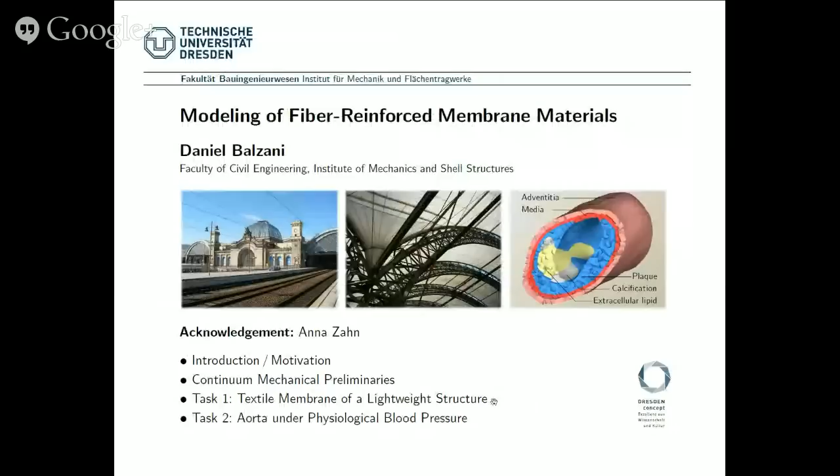So first I will give a short introduction or motivation. Then I will explain some continuum mechanical preliminaries that will be required for solving this task. And then I will come to the two main parts of this task. Task 1 will be the calculation of a textile membrane of a lightweight structure, and the second task will be the calculation of an aorta under physiological blood pressure.

Okay, with respect to the first task, we will focus on textile membranes. These are typically used in engineering applications as, for example, lightweight roof constructions, as exemplarily shown here, or also the roof construction of Dresden Main Station, and also facade cover design, weatherproof awnings, and so on.

The main composition of the material is, as exemplarily shown here, that we have a rather isotropic, soft matrix material, and embedded therein we have a woven fiber network of rather stiff fibers. Those are the ones that are shown here. And they are rather wavy-like.

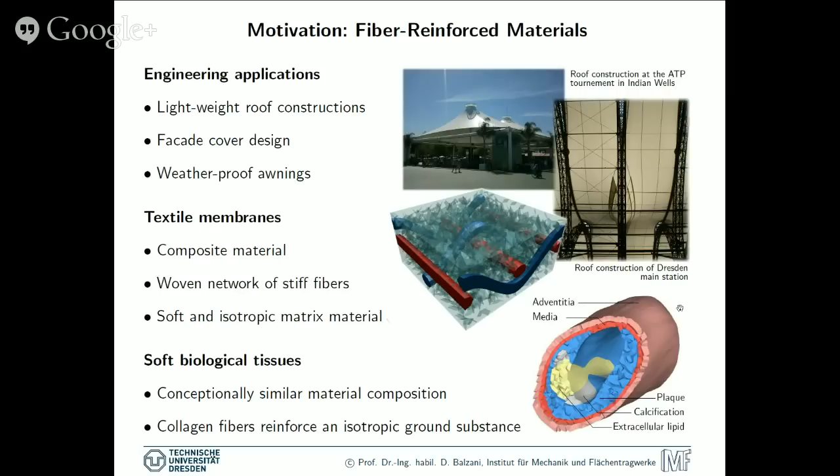In soft biological tissues, we have a conceptually similar material composition where we also have an isotropic ground substance and embedded fibers. Here, with respect to the passive response, typically the collagen fibers that are arranged crosswise helically around this arterial wall. So those two materials are going to be basically calculated in my task.

So first, some continuum mechanical preliminaries that you may need. First, some assumptions. So we consider only idealizations as thin membranes, although we know that in particular diseased arteries may not be really thin. However, this is a necessary idealization to calculate this analytically. Then we focus on the small strain framework, although the materials undergo large strains, but that's just for simplification.

And then we focus on a transversely isotropic model, which means that we have a stiff fiber direction A, and perpendicular to this we have isotropy. And we use this transversely isotropic model for the representation of the individual fiber reinforcement.

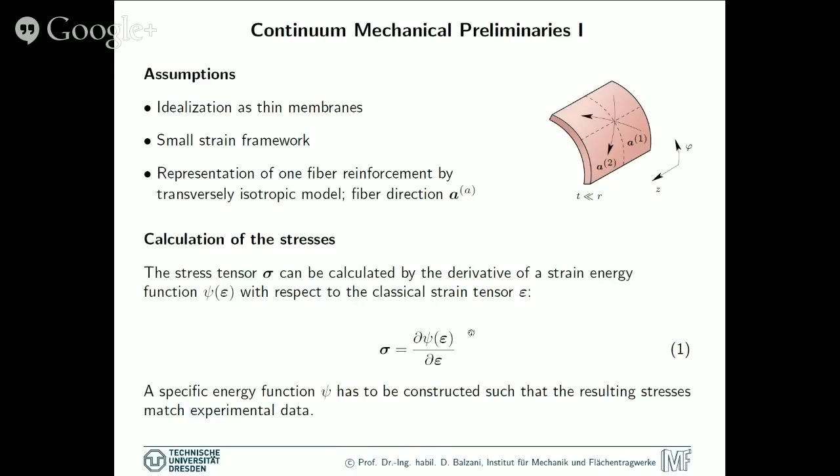For these materials, we can calculate the stresses basically on the equation that is given here. So sigma would be the stresses in the small strain framework, and these can be calculated by a derivative of this strain energy function psi, which is a function of the strain tensor for small strains epsilon, with respect to these strains epsilon. Of course, this specific strain energy function has to be constructed for the particular material such that characteristic stress-strain curves that are measured experimentally can be matched.

Here the particular strain energy function is given, so that's the specific form of the energy function that we consider here. It is decomposed into an isotropic part describing the matrix material and the superposition of two transversely isotropic parts that account for the individual fiber reinforcement. So that would be the transversely isotropic energy associated with one fiber, A. So A is the summation index from 1 till 2.

Material parameters in here are first the Lamé constants and this additional elasticity parameter alpha, which captures the elasticity in fiber direction, so basically the one associated with the collagen fibers. J1, J2 and J4 are so-called invariants, the basic invariants of epsilon given here, so trace epsilon and trace epsilon squared, and the so-called mixed invariant, which is the trace of epsilon times M.

M is the so-called structural tensor, whose coefficient matrix is 3 by 3 and the components ij are computed by the dyadic product of the preferred directions, the fiber direction A, so basically in index notation A_i times A_j, wherein A_i are basically the coefficients of the fiber orientation vector.

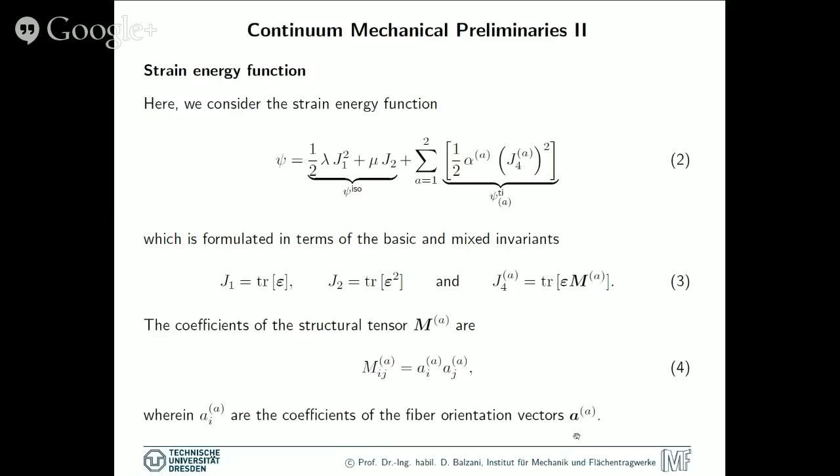So let's come to some remarks that are also required for the tasks. The material parameters, in fact the Lamé constants lambda and mu, can be calculated in terms of the Young's modulus E and the Poisson ratio nu by these formulas. So E and nu will be given in the task description that you find online.

We consider in the task only rotation symmetric structures which are parameterized by polar coordinates. So R will be the coordinate in radial direction, phi in circumferential direction, and z in axial direction. Then we have neglected stresses and strains in radial direction, and the shear stresses and strains are neglected. So this simplifies the whole problem significantly, such that basically we end up with 2 out of the 9 non-trivial equations that arise from this derivative expression.

So in index notation we have this formula where i is either phi or z. So we have basically 2 equations left, one for calculating the normal stress in circumferential direction, that would be sigma phi phi, or in an abbreviated notation where we skip the double indices, sigma phi, which is then the derivative of psi with respect to epsilon phi. And for the axial direction we have the normal stress sigma z equal to d psi with respect to d epsilon z.

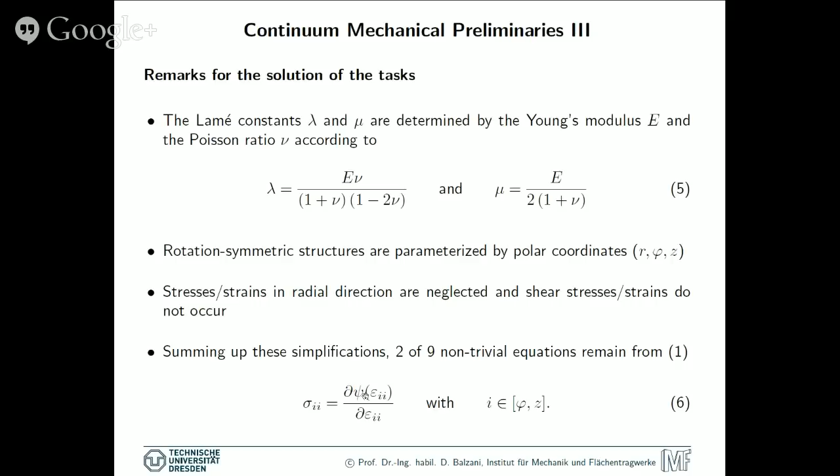Let us now come to the individual tasks. So the first task is the calculation of a textile membrane of a lightweight structure. The structure is given here at the left. So you see this roof construction, for example, for a swimming hall. And basically this shape is obtained by inserting an internal pressure which is slightly above the normal air pressure, and that keeps the structure in shape. So it's an air dome if you want.

Based on this equation we just saw, this derivative which equals the stresses, we basically have a set of 2 equations with 4 unknowns. The unknowns would be the normal stress in circumferential and axial direction, and the strains in circumferential and axial direction. However, as we can see from the boundary conditions here, this is something like a plane strain state.

With normal in z direction, we don't have any strains in the axial direction, which means we can consider epsilon z to be equal to 0. The stress in circumferential direction can be calculated from Barlow's formula, given here. Pm would be the internal pressure, Rm the radius of this membrane, and Tm the thickness of the membrane.

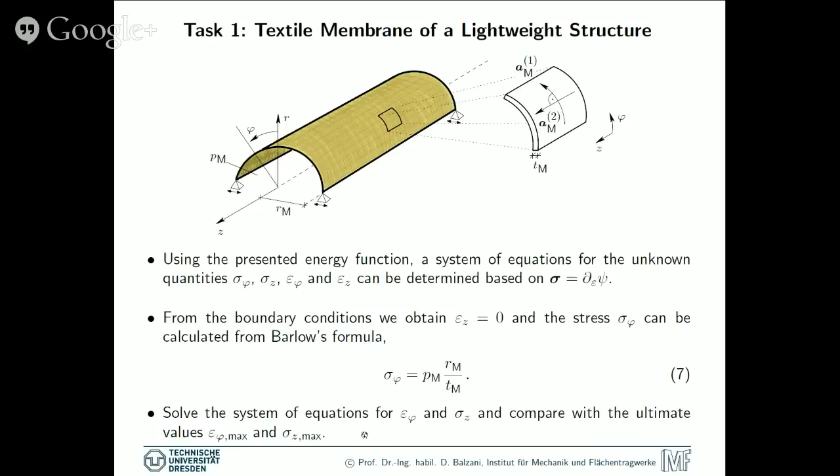Maybe I should also mention that in the full task description you find further small parts of the tasks and further details, so please take a careful look at those descriptions.

What we notice is that first the internal pressure inside these human arteries is significantly higher compared to the internal pressure in the air dome that we considered one slide before. On the other hand, the fiber stiffness is relatively low compared to the textile membrane. So the question now is, how does this structure behave due to the internal pressure?

Therefore, you are first asked to compute in the same way, analogously to task 1, the values for epsilon phi and sigma z, and then focus on this task, which is, I would say, a rather toy task. Basically, although technically impossible, please check if you could, in principle, construct the roof construction in task 1 made of the arterial tissue considered here.

So that's basically what I want to say about the description of the task today. Thank you very much for your attention.

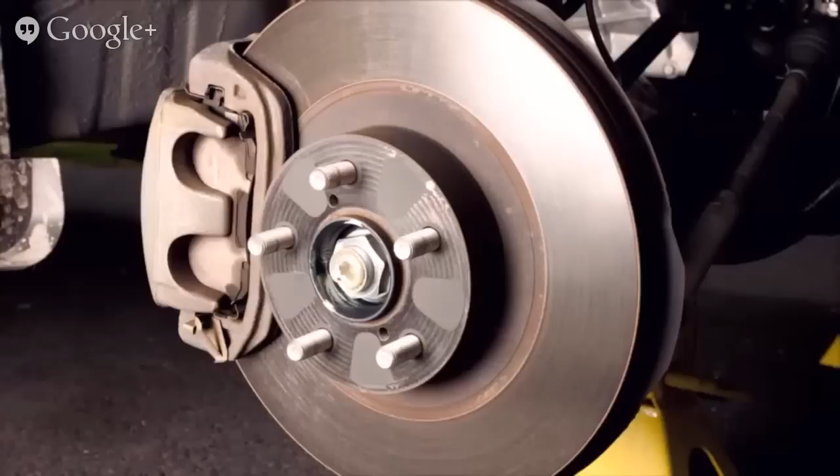Grüß Gott and a warm welcome. My name is Gerhard Müller. I am the head of the Chair of Structural Mechanics here at the Technische Universität München in Munich, Germany. In our institute, we deal with vibroacoustic problems, ranging from structures in civil engineering to components of the automotive industry.

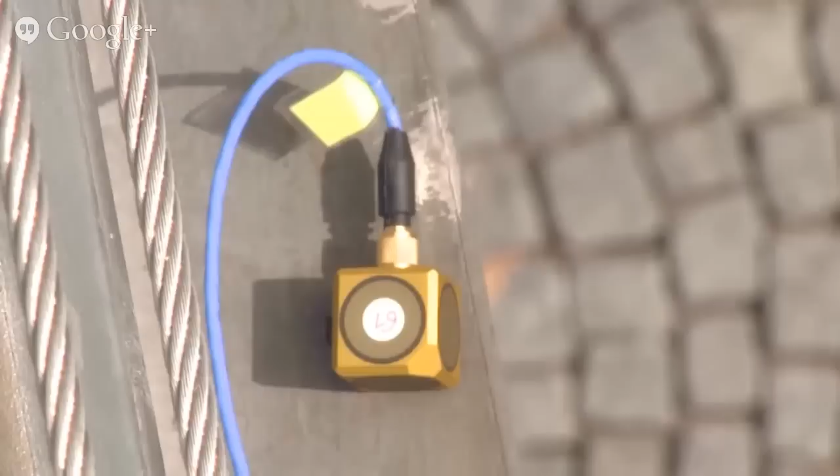Of course, our models are not able to describe the world as a whole. Reality is reduced by them to the important aspects of the problems we are dealing with. This can be, for example, the model of a bridge that is loaded by pedestrians. We create the model, predict the vibration, and check the results to ensure that students cannot destroy the bridge by jumping and shaking.

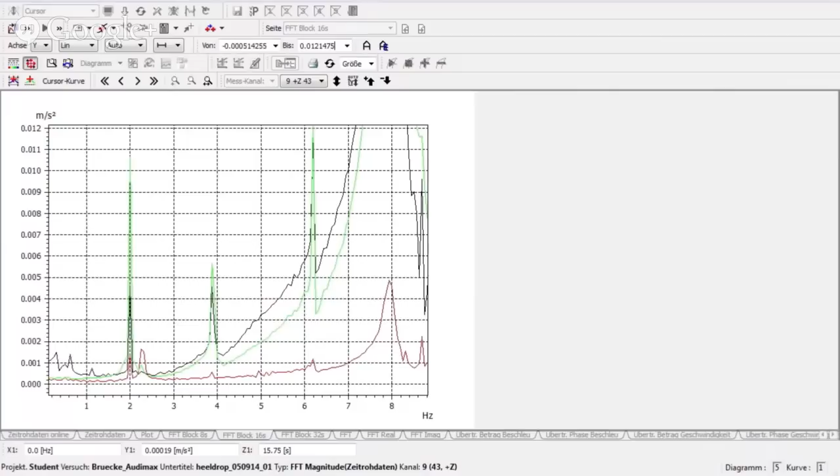As we have measurements of the real structure, we can even compare them now with the results obtained with our model in order to calibrate it.

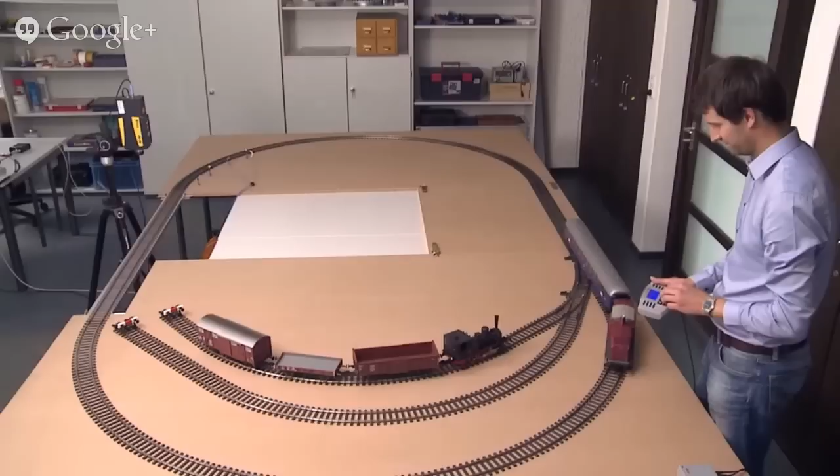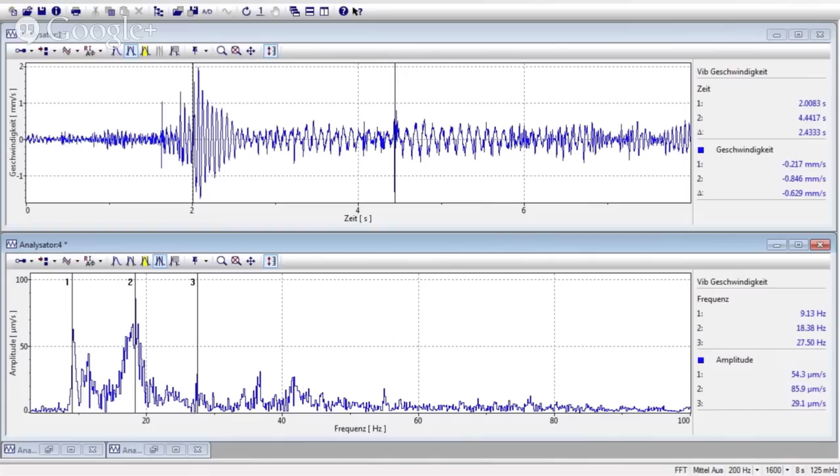In contrast to real structures, investigations can also be carried out on model structures in our laboratories. Look, our colleagues are playing. No, they don't play, they are doing research. They check how far the models they developed fit the measurement results at the model train, with which the typical train-induced dynamic forces, ranging from the regular passing of the sleepers to the roughness of the wheel or the irregularities in the track, can be assessed.

We, the engineers, are able to predict important parts of real life with clever mathematical models in order to optimize our structures and to predict the responses of our systems.

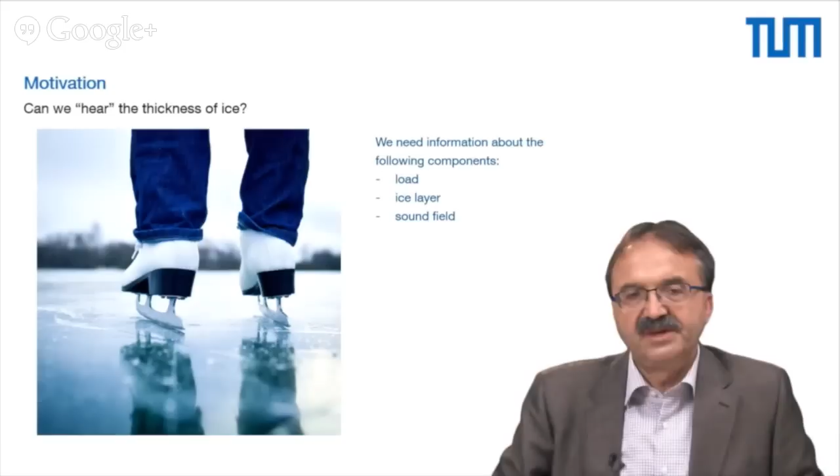Welcome, dear students, to our sessions on models in civil engineering, from cardiology to fishery. In today's session, we deal with the aspect of fishery, regarding the observation that in Arctic regions, fishermen can hear the thickness of ice when it cracks, or when somebody jumps on the ice in their vicinity. So why can they hear the thickness of the ice?

In order to understand this, we should model the whole problem into its different components. On one hand, we have an acoustic fluid where sound is propagating, which transports energy to the ears of the fisherman.

Why is energy transported to the ear of the fisherman? Because energy is propagating in the ice, which we will model as a plate in bending, excited by some jumping person, which induces impulses into the structure.

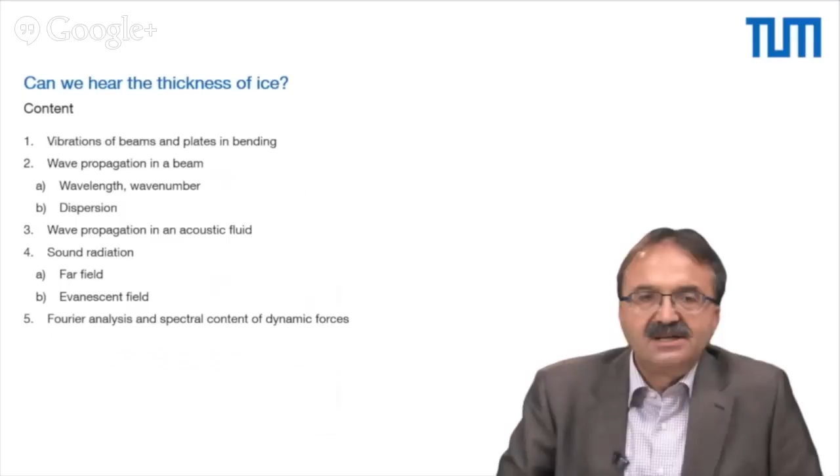Our task today is to split this problem into its components. First, we will talk about plates in bending, which will remind you of beams in technical mechanics from your previous studies. Second, we will focus on wave propagation in such beam-like structures or plates, which is very similar. Third, we will deal with wave propagation in acoustic fluids, where sound energy is transported to the ears of the fisherman. Point four, we will try to understand how sound radiation in the air takes place.

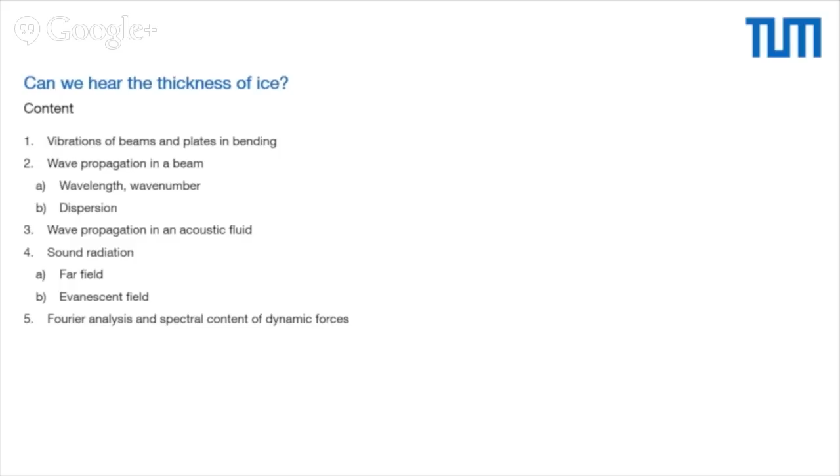In order to understand all these elements, we also have to focus on Fourier analysis and spectral analysis, which I will address very briefly in the presentation.

So let's start with the plate in bending. You see here a plate described by a coordinate system x and y. Perpendicular to the plate we have the coordinate z. The plate has some thickness given by the value t. It has a Young's modulus E and a Poisson ratio nu.

Out of these values, in the scope of the Kirchhoff plate theory, a bending stiffness can be derived, given by this formula. Furthermore, the plate has a mass, described by the value mu, which is nothing else but the density times the thickness of the plate. So it has a dimension of something like kilogram per square meter.

The plate is then described by the so-called Kirchhoff model, which I will not address in detail—you probably have heard about that in your technical mechanics courses. This partial differential equation of order 4 has different elements. It has partial derivatives of the displacement of the plate in the perpendicular direction w with respect to the x and y coordinates, and also a partial derivative with respect to time, where the inertia effects of the plate are represented.

On the right hand side you have some load exciting the plate in the z direction, p of x, y, and t.

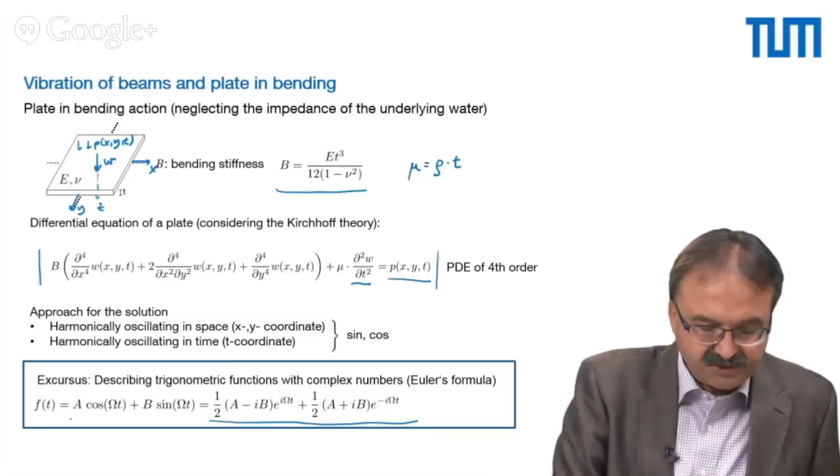For those familiar with complex values, such functions can be nicely described by this Euler formula, or you can also describe them this way. We, however, in the following will stick to this type of representation.

Taking this harmonic approach and putting it into the partial differential equation, we obtain a simple algebraic equation which links the load with the displacement by this formula.

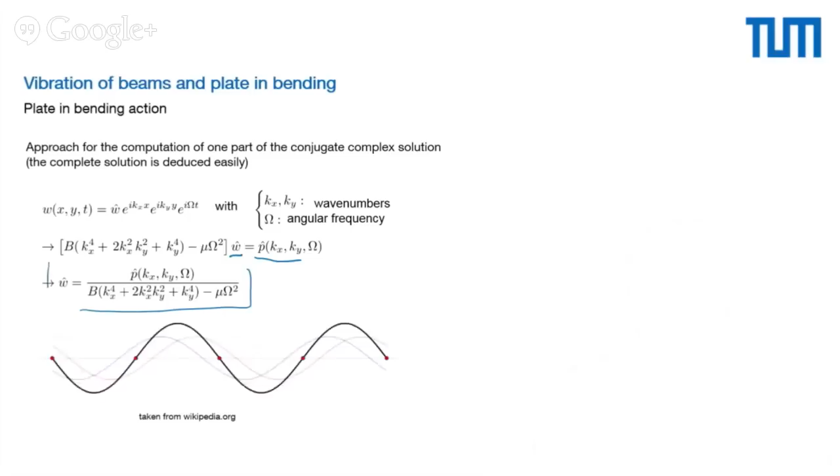The elements of the solution can be visualized by propagating waves in the plate, and if we take a beam in the one dimension of a beam, these waves have a certain wavelength given here, called lambda.

If we describe the function with respect to time, this corresponds to the period of vibration, typically described by capital T, and calculated out of 2 pi over omega. You also see that out of a superposition of these oscillating functions, we can construct a standing wave, like you see here with the black line, which we observe in delimited plates.

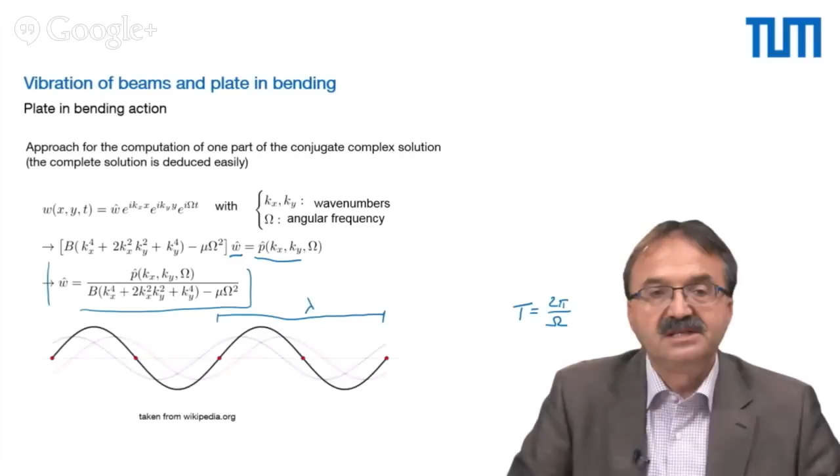However, we now consider an infinite plate—we consider the ice, which is excited by the jumping person. So if we take the ice without an external load, we can skip the right-hand side of the differential equation, where originally we had the load, and place a 0 on the right-hand side.

Such an approach now leads to the ratio of the wave numbers kx and ky and the angular frequency of oscillation omega, which you see here. One can show, and I don't show it here explicitly because it would take too much time, but you can try to understand this on your own, that the combination of the wave numbers kx and ky can be interpreted as a wave number kb, which is somehow inclined with respect to the x and the y coordinates of the plate. And we thus obtain now a ratio between this wave number kb and the angular frequency omega, which is given by the quotient of the mass per surface area and the bending stiffness of the plate.

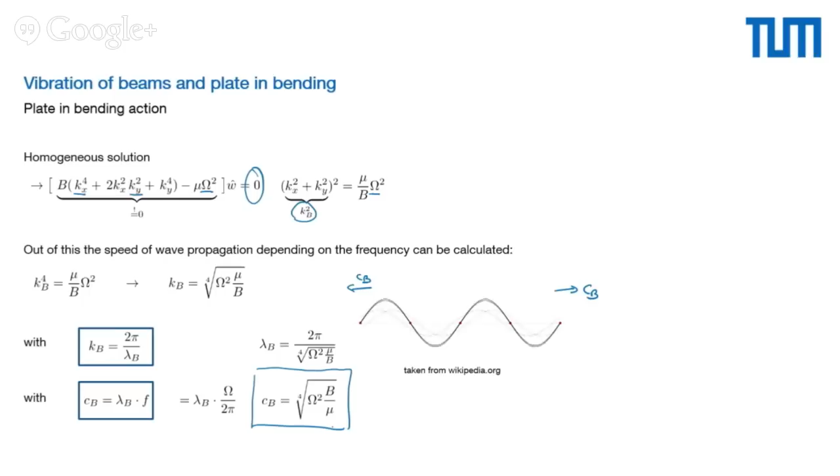Putting those things together and knowing about the relation between the wave velocity of the propagating waves, like we have in the two directions, the wavelength and the frequency of oscillation, we finally obtain a nice relationship between the bending wave velocity, the angular frequency, the bending stiffness, and the mass per surface of the plate, which will be decisive for the understanding of the phenomena we are dealing with.

If we draw now this bending wave velocity with respect to the angular frequency, you will see that we have here a function which depends on the frequency. We call this phenomenon dispersion of the bending wave, and we also can draw a function of the bending wavelength with respect to the frequency, which you see here on the right-hand side of this picture.

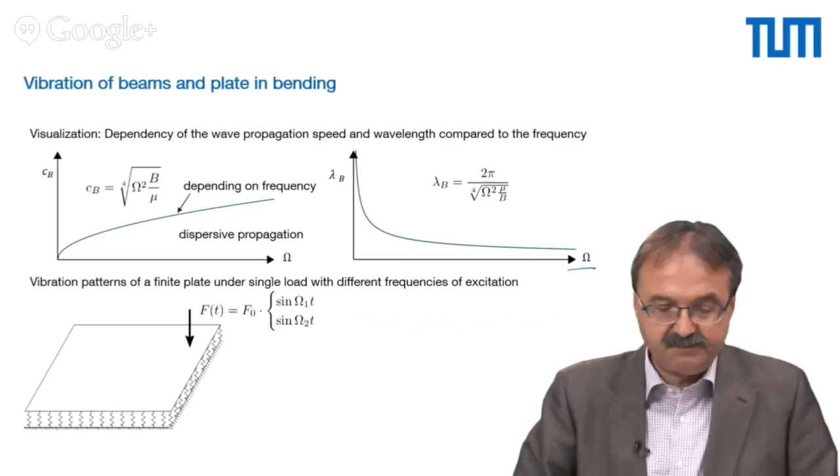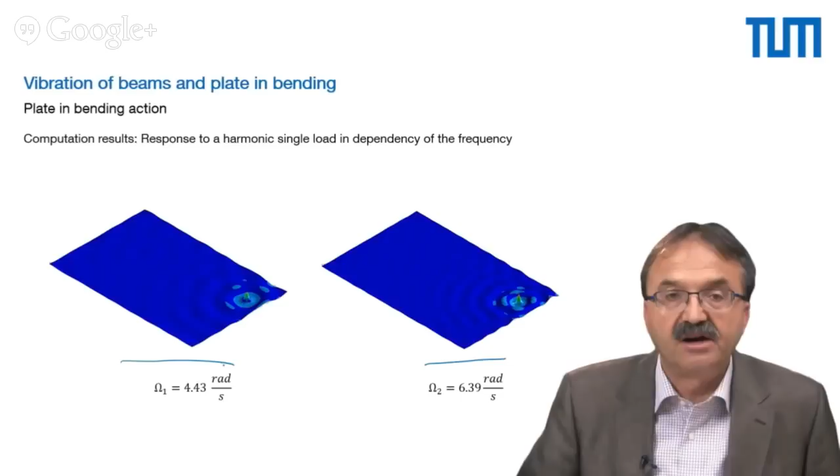Now, taking some load which is exciting a plate, we then can see here different patterns depending on the frequency of excitation, and you see here for higher frequencies we have shorter wavelengths like on the right-hand side, and for lower frequencies we have larger wavelengths as results for our harmonic single load exciting such a plate.

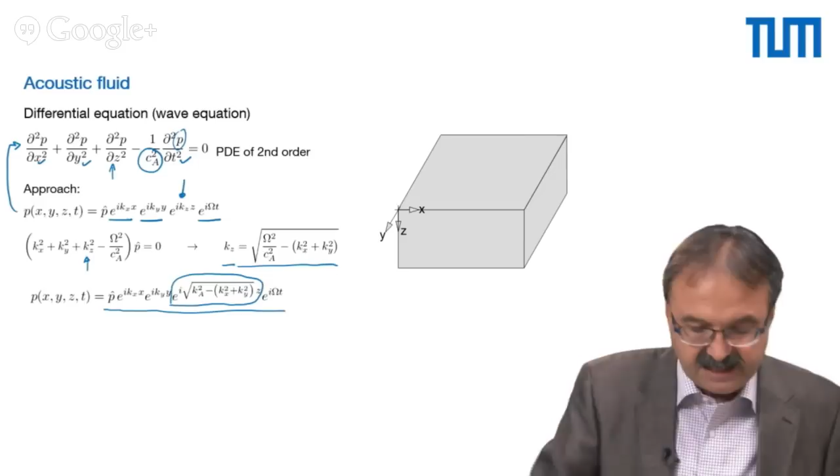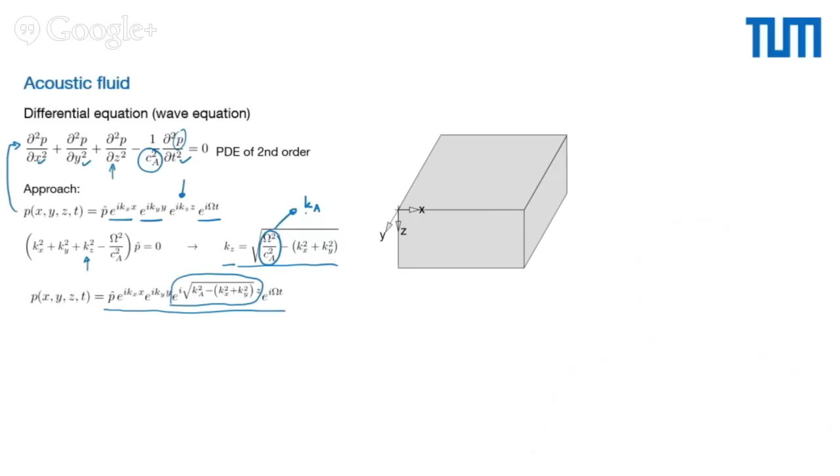So our new approach is given in this form, and you see here we have in the z direction a certain element which we will discuss now a little more in detail. We abbreviate this element now by substituting it by ka, the wave number in the air. Now, taking these forms, we realize that the solution in the z direction depends considerably on this value ka compared to the values kx squared and ky squared.

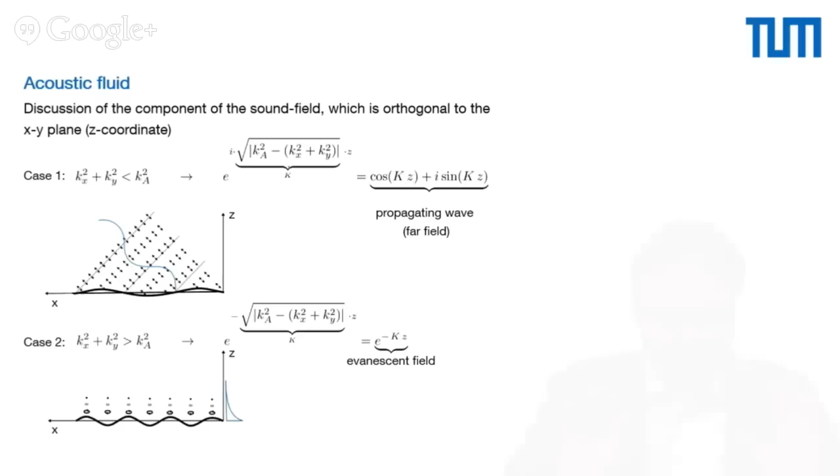In the following way: in case 1, when ka squared is larger than kx squared plus ky squared, we obtain in the z direction a solution which again is harmonic. That means that we have in the z direction also a sine and cosine dependency of the pressure with respect to z. One can now show that this solution is linked with a wave which is propagating under a certain inclination from the plate into the fluid, and this wave can be described by cosine and sine functions with respect to z.

In the second case, when ka squared is smaller than kx squared plus ky squared, the exponent of the exponential function becomes real. And as you know, a negative real exponent is linked with a decaying function, which you see here. That means that the pressure decays from the xy plane, and if the person, the fisherman standing here, has such a size, he will probably not hear the sound field anymore, whereas if he's standing here in this wave pattern, he will be fully affected by the sound field which is propagating from the plate.

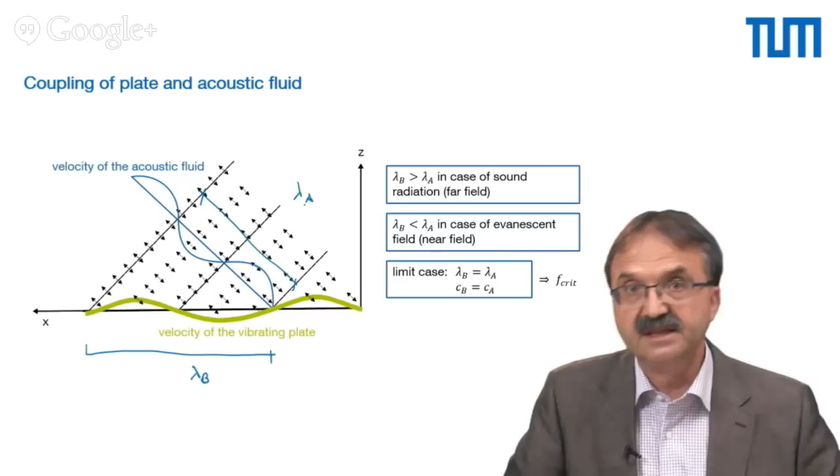The first case we call propagating waves or far fields. The second case we call evanescent fields or near fields of this radiation problem. That means that just under certain circumstances, namely in case that the bending wavelength, which is given here, lambda b, is larger than the wavelength in the air, which I call here lambda a, we have this radiation phenomena. In the other case, if the bending wavelength gets shorter than the wavelength in the air, we will have evanescent fields which just cause near fields which radiate very poorly.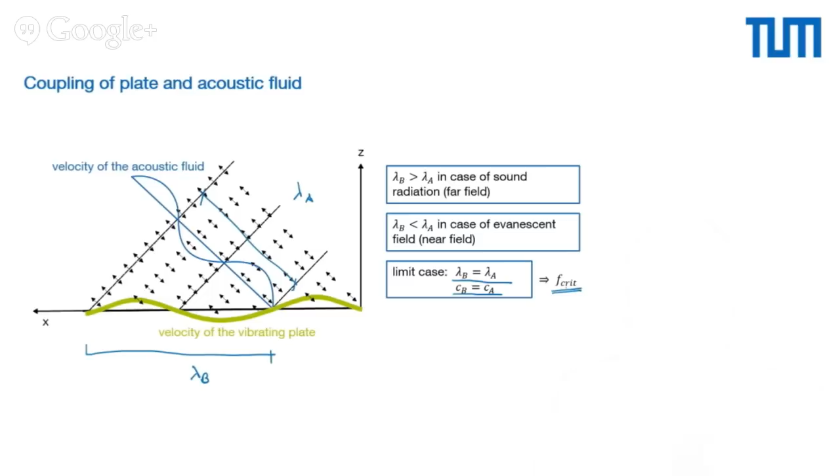In the limit case, when both wavelengths are equal, or in other words, when the dispersive bending wave velocity is equal to the non-dispersive speed of sound in the air, we have the so-called critical frequency, and this critical frequency is then decisive to decide whether the problem radiates or whether it radiates not really.

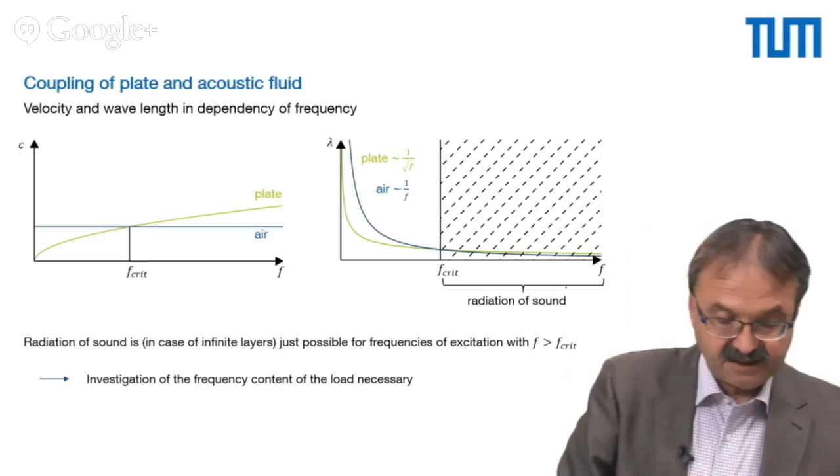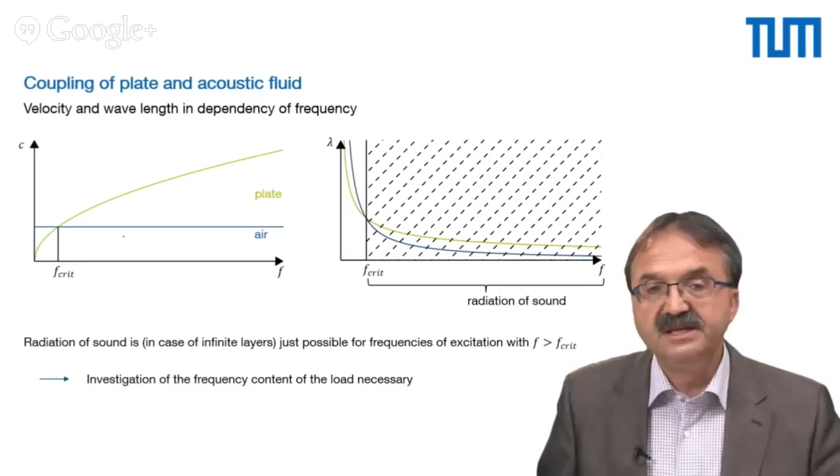So let's couple now the air with the plate, and you see that the speed of sound in the plate Cb and the speed of sound in the air Ca will cross at a certain critical frequency at this limit case. Above this critical frequency, the bending wavelength is longer than the wavelength in the air, and we have a radiation of sound. Below we have these evanescent fields. And depending on the thickness of the plate, you see here different crossing points, different critical frequencies, and this means that at the basis of the critical frequency you can deduce the thickness of the plate.

Now we have described the plate, we have described the fluid, and now we should focus a little on the load. And as you probably know from your courses, we can look at an impulse load and describe the frequency content of an impulse load by taking the impulse load, assuming that this impulse load repeats after a certain while t, and then carrying out a frequency analysis, which is also called Fourier analysis. We make a Fourier series for this load. The Fourier series is given here, so you can cross-check it on your own if you are interested.

And if we have one single event, we can increase this t towards infinity, and we come from the Fourier series to a Fourier integral, to the Fourier transformation, which shows that the load P of t, which is a very short impulsive load, can also be described in the frequency content by a P of omega with constant values independent of the frequency, so constant over the frequency range. So this means that by this impulse, or also by the crack, we will have a very broadband excitation from high to low frequencies.

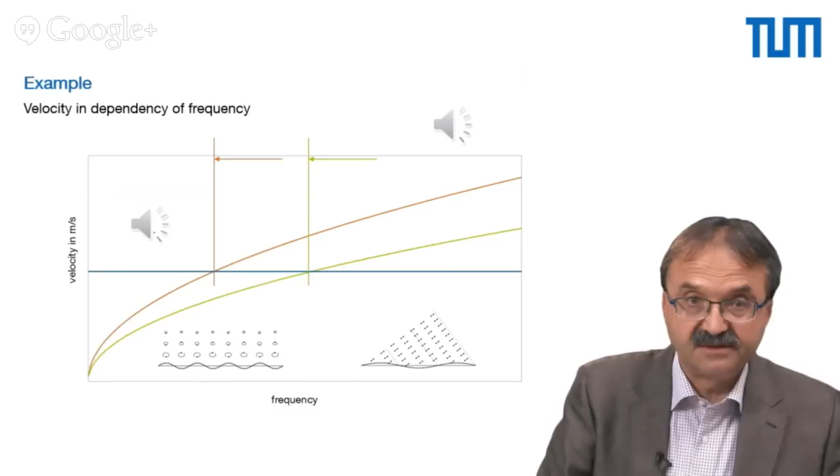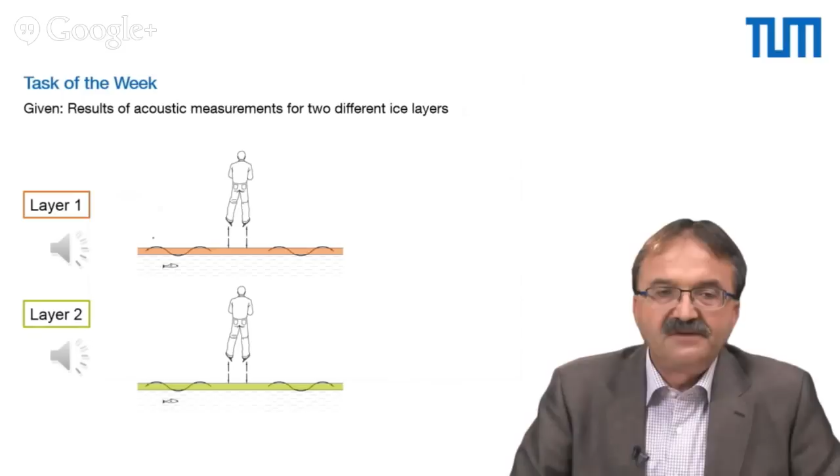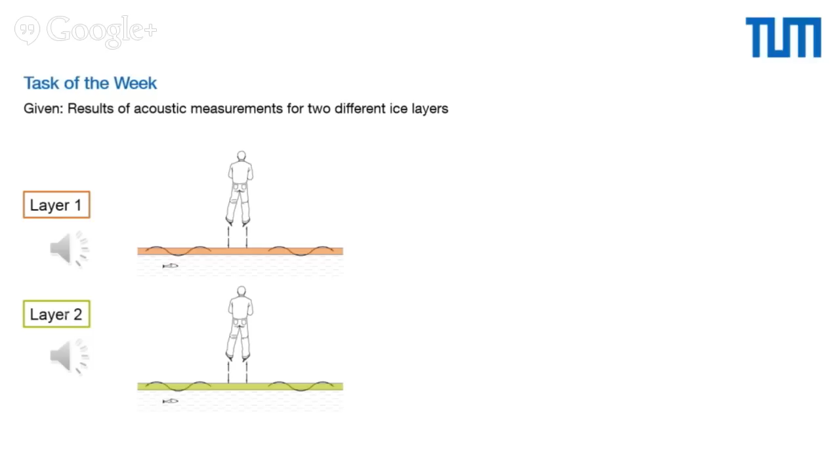So now we come to the task, and we would like to think about the following problem. So we have two different types of ice, a layer 1 and a layer 2. Let's listen to layer 1. Let's listen to layer 2. Unless you have an absolute hearing, you will not be able to tell us what is the frequency the signal finished in its process. So let's measure it. So we measure the first layer and we measure the second layer.

On the other hand, you also have some assumptions concerning the Young's modulus, which is given here, the density, which is given here, the wave velocity, the speed of sound in the air, and the Poisson ratio. So with these values, you should now be able to assess the thickness of the ice, knowing the lower frequency of the perceived sound. The question now is whether this model you applied here is conservative or not.

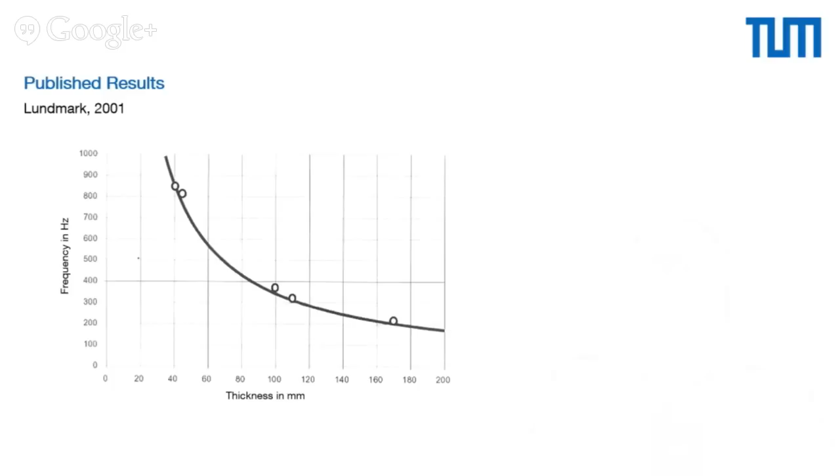You should for this consider, in the whole process of our derivation, which elements we neglected. There was one important element which we didn't take into account. You should think about that. Which element was that? And then I would also like to draw your attention to the results that have been published by Lundmark in the year 2001, who correlated the thickness of ice with the perception of fishermen who had the ability of absolute frequency perception.

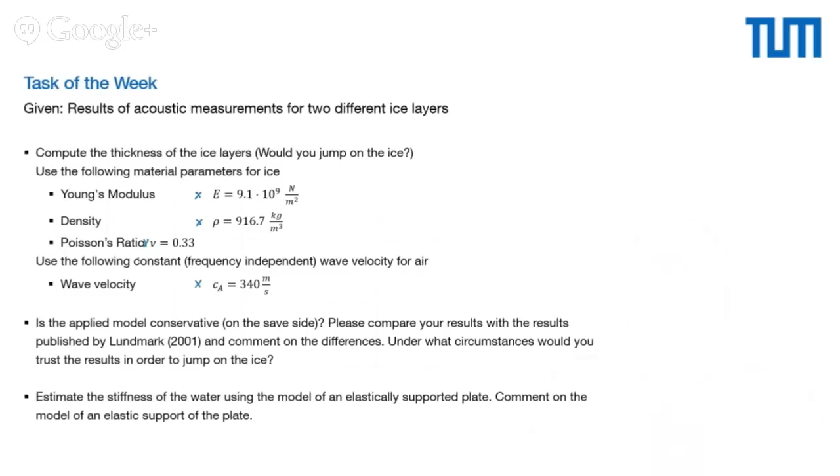For the experts among you, for those who know the differential equation of the Kirchhoff plate and also know the relevance of the different elements, I would like to ask you to estimate the stiffness of the water using the model of an elastically supported plate, comparing your results with the results obtained by Lundmark. You then can get a feeling of the limits of your model, and you can also get a feeling of how models can be calibrated by measurement results.